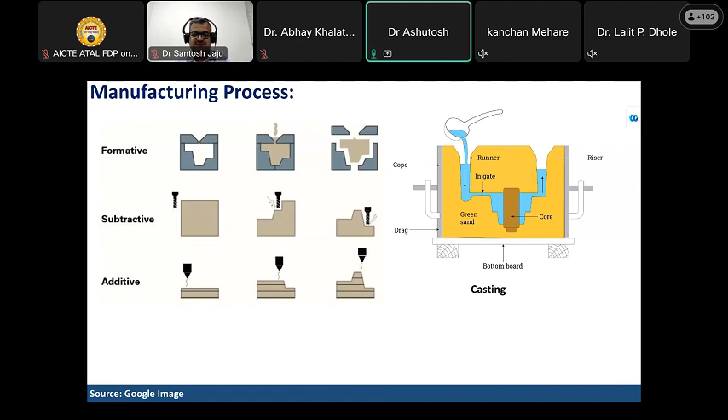These all three are conventional manufacturing processes. The other, non-conventional manufacturing process, which is the main theme of this FDP, is additive manufacturing. In additive manufacturing, everyone knows what we are doing: we are adding material one layer over another, and we get the final product produced. So the comparison between subtractive manufacturing and additive manufacturing is that when we do subtractive manufacturing, we create a lot of waste, the scrap material we are talking about.

In additive manufacturing, with the material we use to get the final 3D object, only a minimum amount of waste is created, in the form of support systems. This is the basic difference between subtractive and additive manufacturing: the waste generated through subtractive manufacturing is very high, while the waste generated through additive manufacturing is very low.

This point, at least, you should remember. So what is additive manufacturing? It is the process of joining material to make a three-dimensional object, usually layer by layer, commonly called 3D printing. It allows manufacturing a component with virtually no geometrical limit or tool limitation.

In subtractive manufacturing, there is always a limitation because engineering works with linearity. So if there are non-linear components which we need to manufacture, there is always a limitation. But in 3D printing, or 3D manufacturing, or additive manufacturing, this limitation is not there.

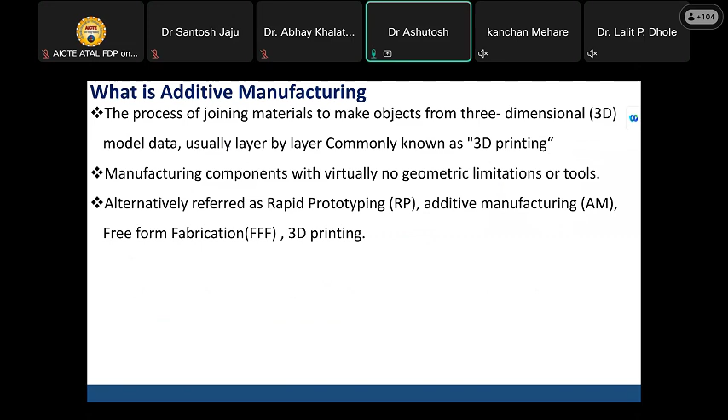Secondly, you have mostly heard the words rapid prototyping, additive manufacturing, free-form fabrication, 3D printing. These are all synonyms. There is no difference between all these manufacturing processes; it is only the name, or synonym, given to them.

The main advantage which 3D printing gives us is moving from designing for manufacturing to manufacturing for design. Mostly, when doing conventional subtractive manufacturing, we design the component based on the manufacturing process, so we always need to think about what manufacturing process we are applying, and do design optimizations accordingly.

While in 3D printing, we are using the manufacturing process as per the design. If your designs are non-linear in nature, 3D printing has the advantage of being able to manufacture it, and it has some distinguished differences from the conventional subtractive manufacturing process, as shown in this figure.

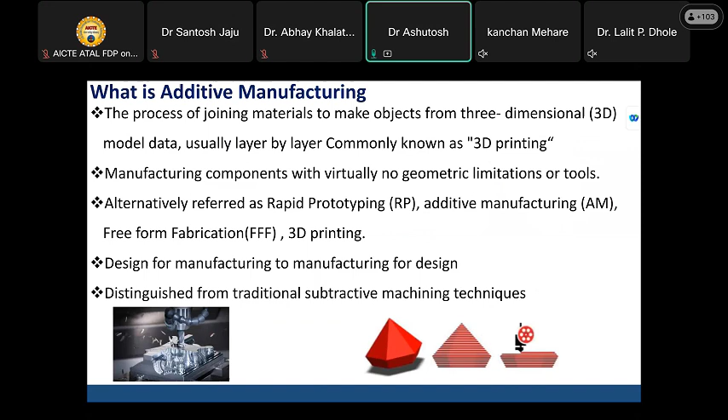The general process used for 3D additive manufacturing first involves geometry development. For this, we need to use any kind of CAD model or CAD software, like CATIA, Creo, Tinkercad, or whatever software you have. There are also many freewares available for geometry development.

Once we develop the geometry in three dimensions, we need to convert that 3D model into the STL format. STL format is basically a surface geometry format which the printer can understand.

After converting to STL format, we do material processing and layering, where we convert the 3D model into a number of slices, and each slice is then printed by the 3D printer by adding one layer over another to get the final object.

Talking about advantages, it gives freedom of design, complexity for free. We are potentially eliminating tooling, so whatever problems exist with conventional manufacturing regarding tool wear and tear are not present with 3D manufacturing.

It is lighter in weight. We have the freedom to decide the infill, starting from 10%, 20%, depending upon the geometry selected. So we can make the material lighter in design, and we can completely eliminate production steps we always need to consider in conventional manufacturing.

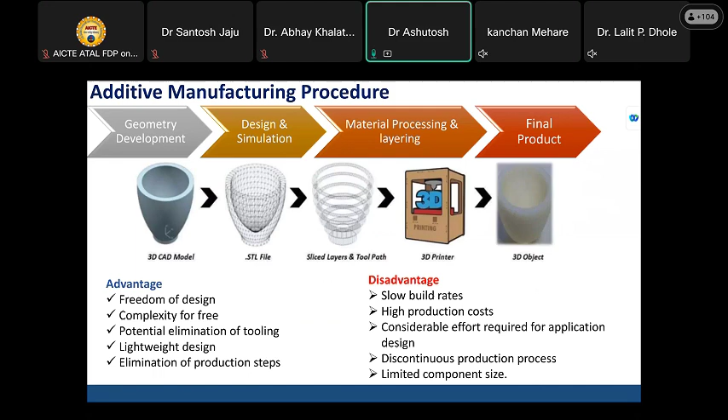So when we need formative manufacturing for high volume production, we use subtractive manufacturing for simple geometry at intermediate volume, and additive manufacturing only in the case of complex geometry at very low volume.

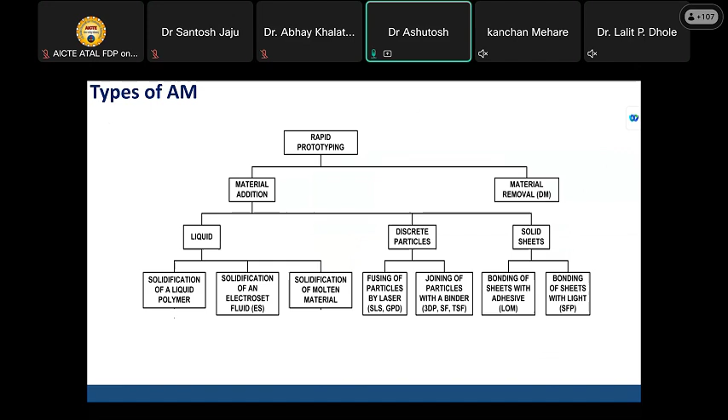Then solid sheet—basically bonding of sheets with adhesive—is called solid sheet additive manufacturing, and bonding of sheets with some kind of light is also called solid sheet additive manufacturing.

When categorizing additive manufacturing processes, they are broadly categorized as binder jet, material extrusion, and others. In material extrusion, it is liquid deposition modeling or fused deposition modeling. The FDM printer, which we already talked about, has been available from the 2000s onward, and it is very cheaply and easily available.

Then we have powder bed fusion additive manufacturing, which includes selective laser melting, selective laser sintering, multi-jet fusion, and electron beam melting. Which additive manufacturing process we need to select basically depends on what material and what is the purpose or functionality of the product we are expecting.

FDM printed parts are always used only for prototyping. It cannot give functionality. There is always a debate about this. In some cases it can definitely give functionality, but only for static structures or just to give an overview. Exact functionality cannot be obtained with FDM printing.

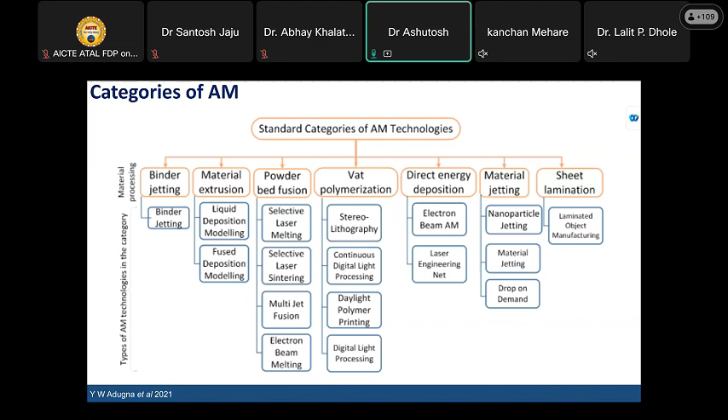Then we have the vat polymerization process. Similarly, we have direct energy deposition, where we are using lasers and so on. Then material jetting process, nanoparticle jetting or drop on demand kind of jetting, and sheet lamination. So these are basically 6-7 categories by which we can classify additive manufacturing processes.

The first process that is most commonly used is stereolithography. It is the most widely used rapid prototyping technique, where we use a photocurable polymer material and use a laser to cure it.

As shown in this figure, it is a photocurable polymer with a movable bed on which one layer gets cured, then the movable table is lowered by one layer thickness, and another layer gets solidified on that. This basic technique is called the stereolithography technique.

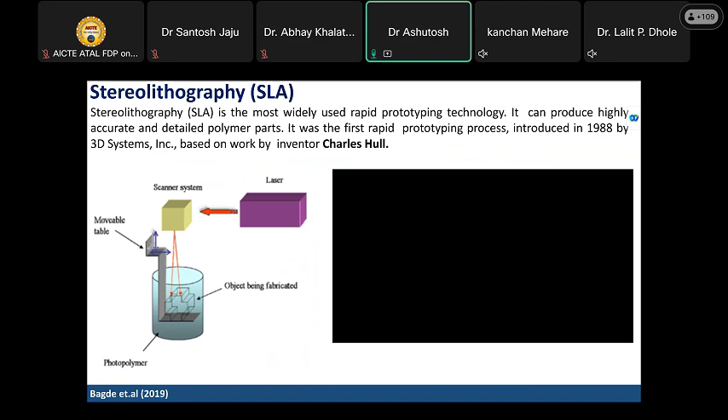We will get sound with this video. If you see how this SLA printing is done, we'll identify it.

This is the build platform, on which the particular part will be manufactured. Below is the resin tank where we are putting the photocurable resin.

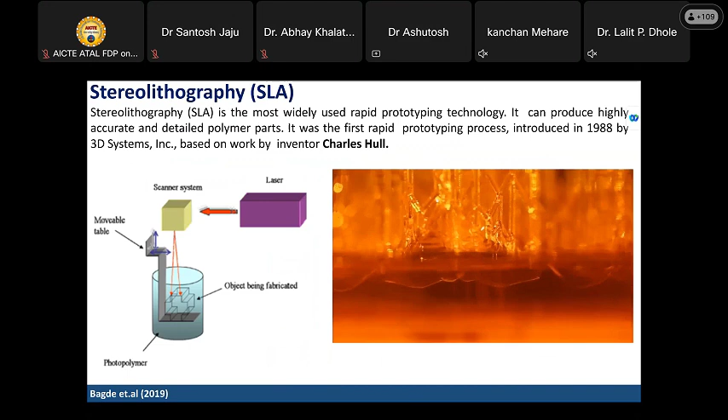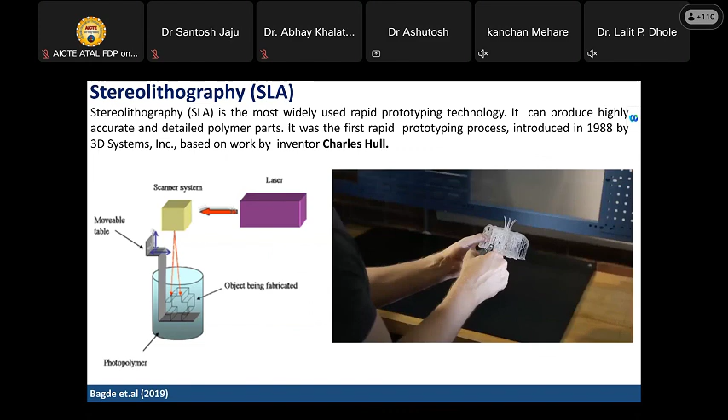Instead, we need to wash the material for the extra material and support system.

With this SLA printing, we can produce the material from the softest part to the hardest part.

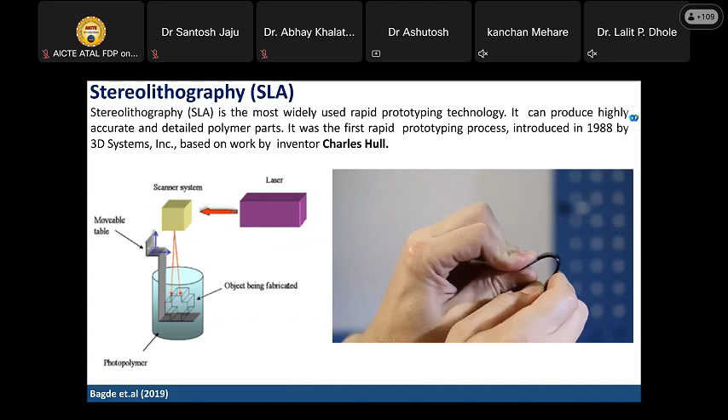This will show the toughness or strength of the SLA printed material in comparison with the FDM printer.

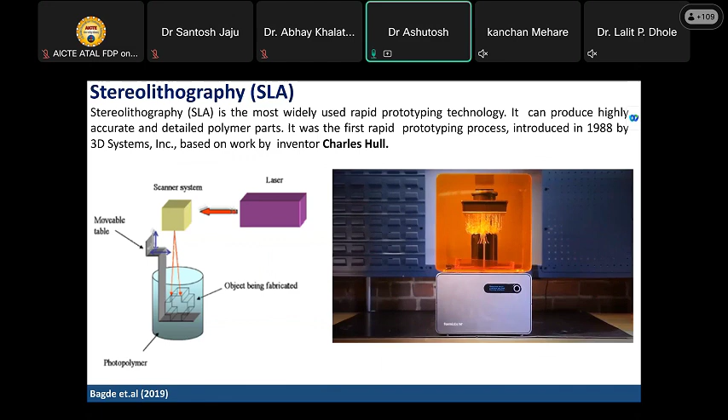So, this is about SLA printing.

Now, another printing process is laminated object manufacturing. This process is similar to a mini 3D printing process where the material is in the form of a spool. The material comes onto the build platform, then it is cut into the desired shape using the laser cutting system.

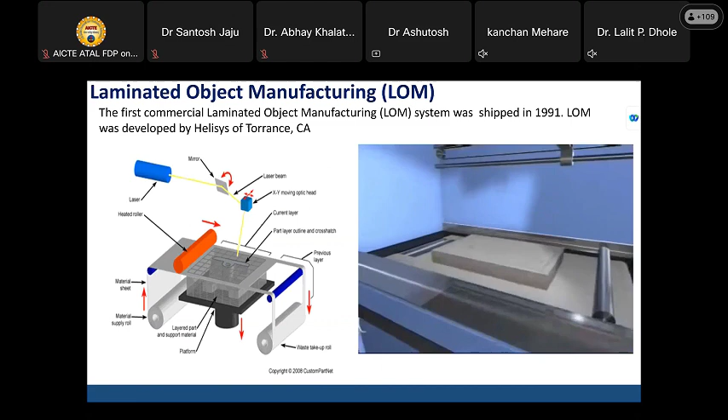If you see, one of the main things that controls it is the pattern.

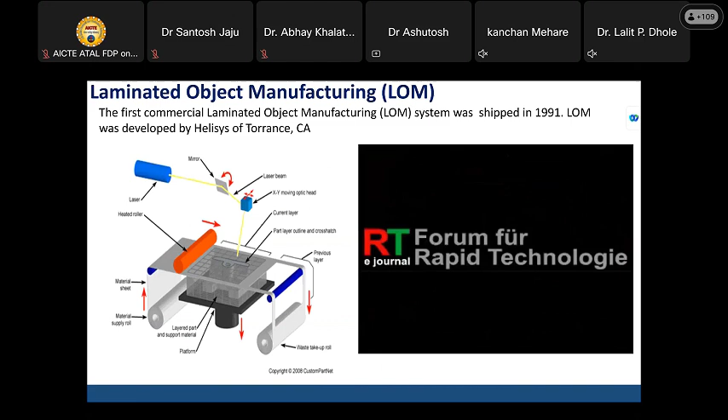This essence is about SLS printing. In SLS, what we are doing basically is using the laser to bind two different kinds of particles together. It consists of the powder bed, roller, and one fabrication platform.

One layer thickness of material rolls over the building platform. It gets sintered using lasers, and once sintered, the building platform lowers by one layer thickness, and a fresh powder layer rolls over that part.

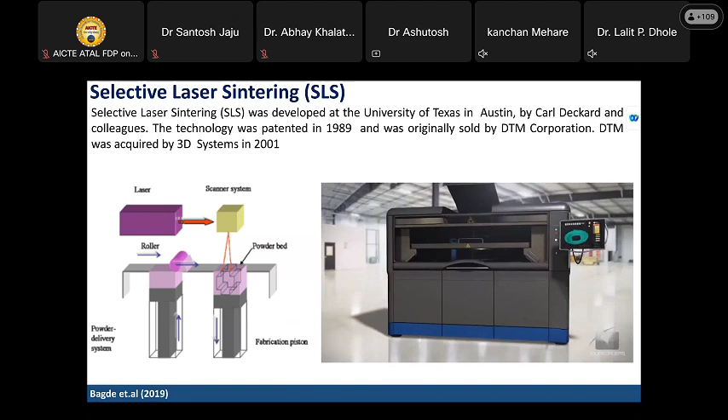This is the SLS printing process, which comprises the use of metal for producing the part for end use without using any kind of tooling. Then the most common technique is FDM, fused deposition modeling.

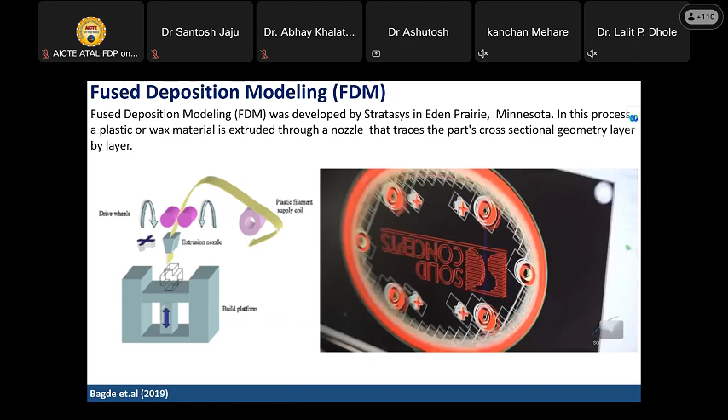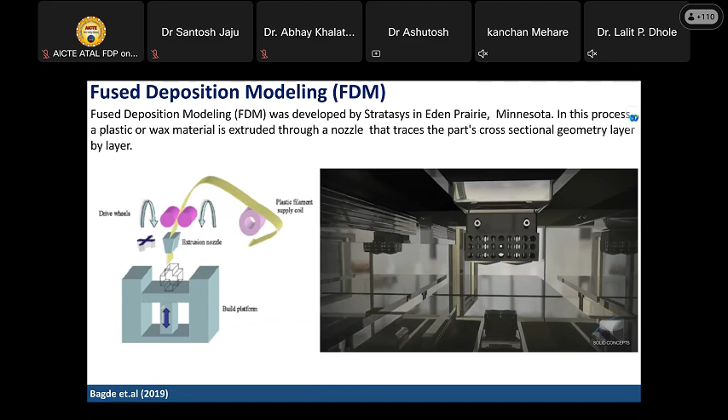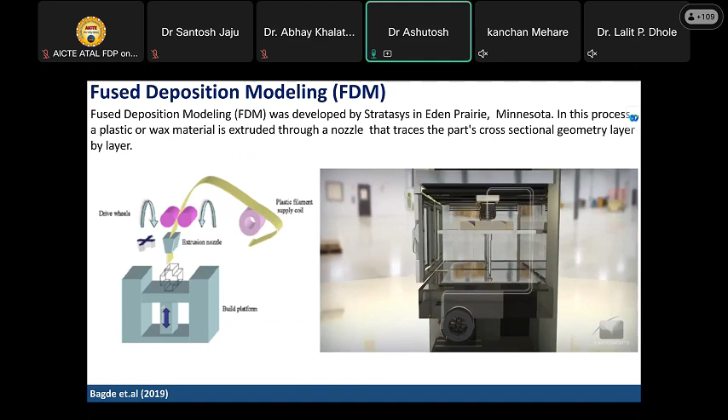It requires a kind of material - one for the model material and also the support material. And to support it, it will be easy.

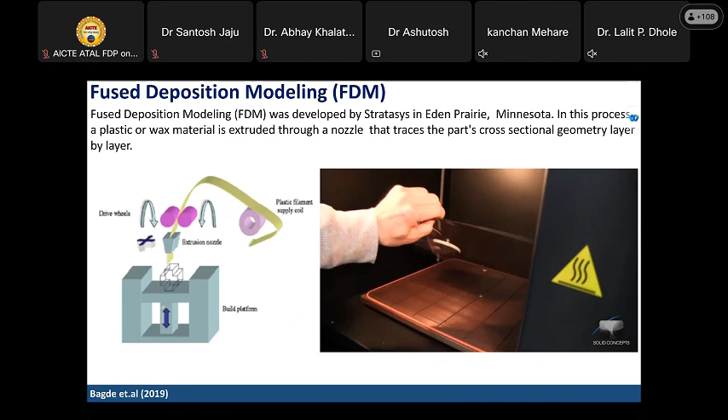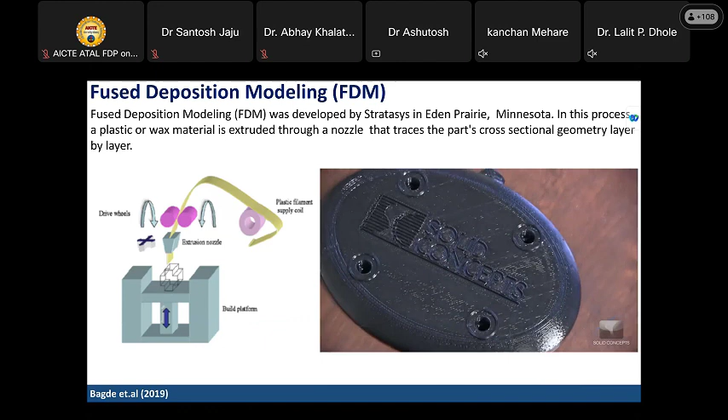So whatever we are thinking, with experience, it requires some kind of post processing to get to the finished surface.

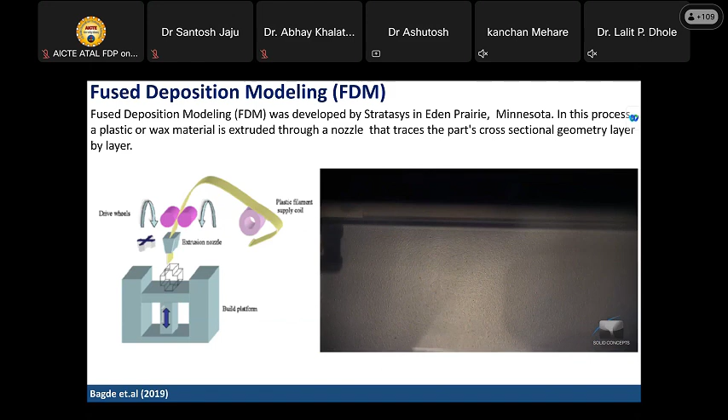So a very common manufacturing process is the FDM process, which we are aware of.

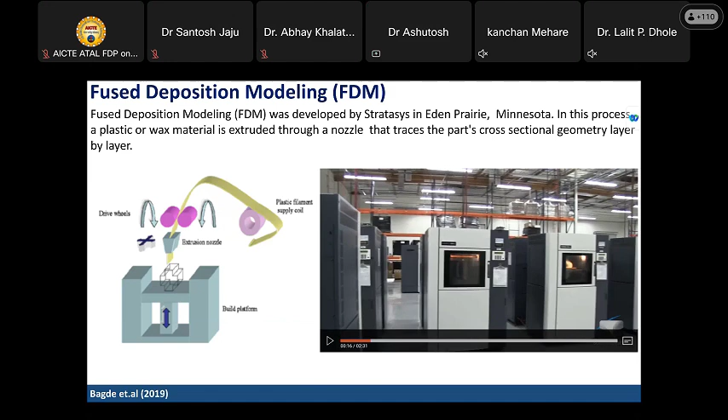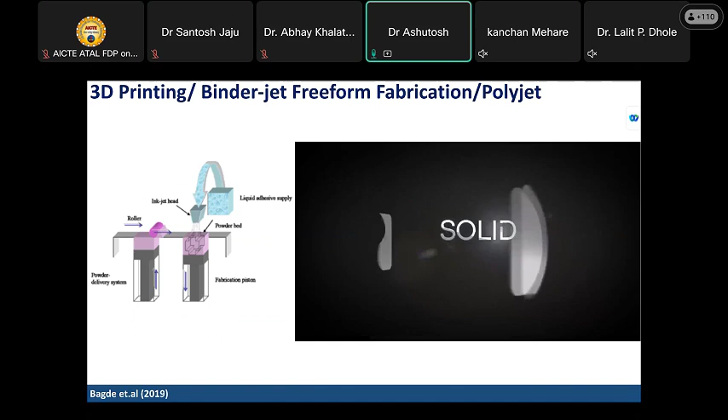The next process is 3D printing and binder jet freeform fabrication, also called polyjet manufacturing. In binder jet printing, rather than melting the material in the form of a spool, we just spread the material with a binder on the building platform. The difference between SLS or metal printing and binder jet printing is that in metal printing we use laser power to sinter, solidify, or mold the material, while in binder jet we use only a binder material which binds the particles together. As shown in this figure, from the nozzle we spread the binder in desired dimensions, and the powder that needs to be solidified comes out from the roller side and attaches to these binders. So it is about spreading the binder and the powder together.

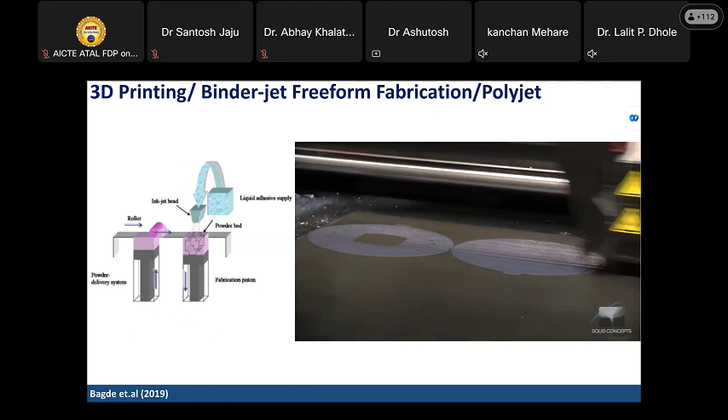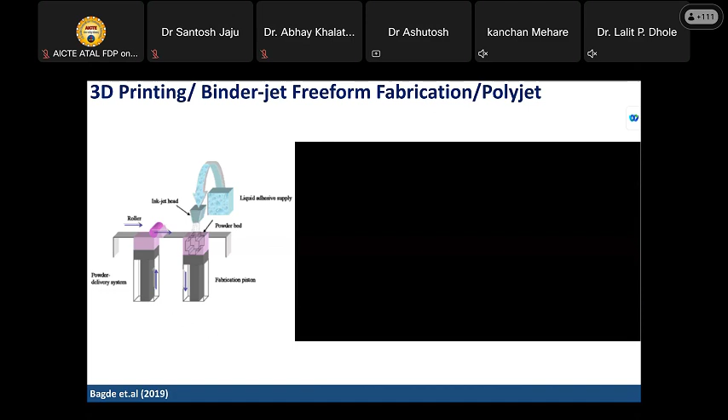So these are the different basic techniques which we are using. Now the next question that comes to mind is that there are so many different kinds of processes. I think my screen gets stuck, it is somehow delayed.

So the next question basically comes right now: there are a number of additive manufacturing processes, so what is the thumb rule for selecting the material or selecting the manufacturing process?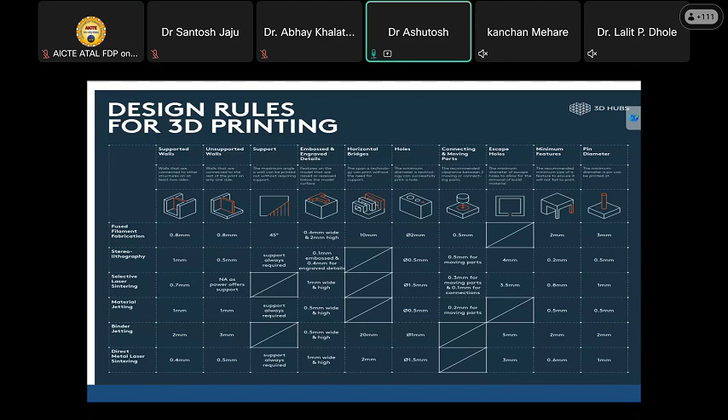This table is readily available on 3D Hubs, and you can get more detail there for understanding. I'm not going to take you through all the technicalities of these rules for the 3D printing process.

So basically, what is the timeline and application of 3D printing? Additive manufacturing or 3D printing started from 1988 onwards, and the first graph will show you how it evolved. Now 3D printing has huge applications in any kind of field - you just name it, you will find some kind of application.

Basically, 3D printing, especially the metal 3D printing process, was innovated only for aerospace applications, because the structure of different components used in aerospace industries is so complex that it is very difficult to produce with normal subtractive manufacturing. So it is basically the need that drove the invention of the metal 3D printing process.

Then you can find additive manufacturing in armament, automobiles, dentistry, electronics, furniture, implants and prosthetics, jewelry. You just name the area and you will find there is always something with the 3D printing process that we can do. Toy manufacturing is also another area where people are using it.

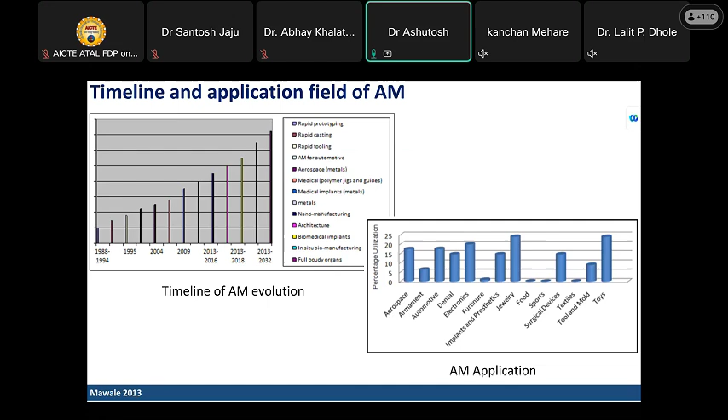Food is a very good area where people right now are not that much aware, but yes, they are using 3D printed food for serving to customers. In ornament and jewelry sections, now everyone wants some kind of uniqueness in their jewelry, so 3D printing companies are manufacturing 3D printed jewelry. I will give some examples of that.

When we are talking about the market size, in 2017 the market size was about 902 million dollars, and by 2027 it is expected to grow significantly over 10 years. This gives a clear picture of the future of 3D printing. It is only one segment, customized jewelry, where such huge demand exists, growing at 21% CAGR.

Another application is 3D printed food. There are some companies which use 3D printing, like Clear Meat. I met the founder and co-founder; they are from JNU, Delhi, and they produce 3D printed meat for use. Sugar and Space is another company which produces this.

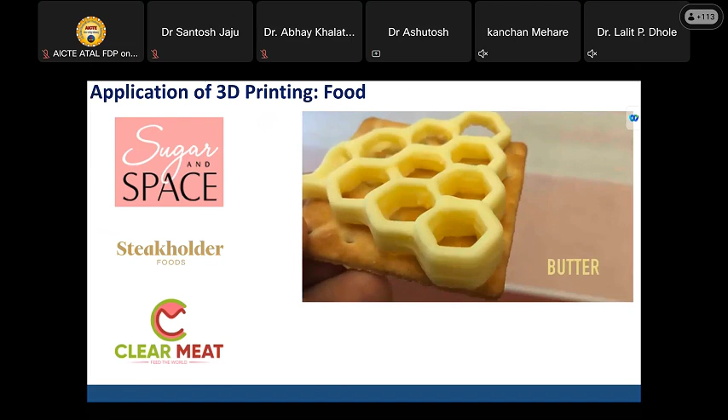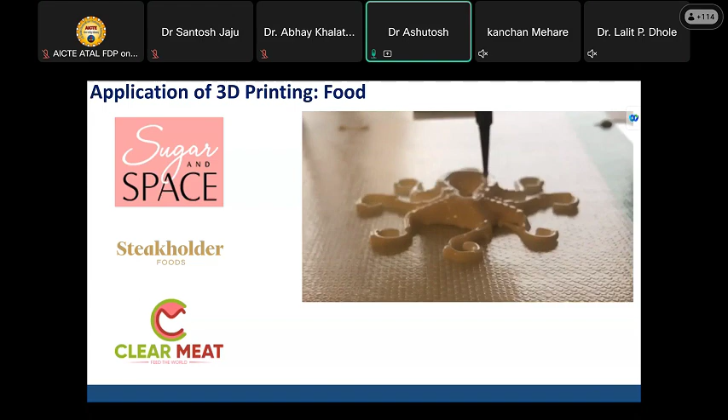All are the edible food which has been made using 3D printing.

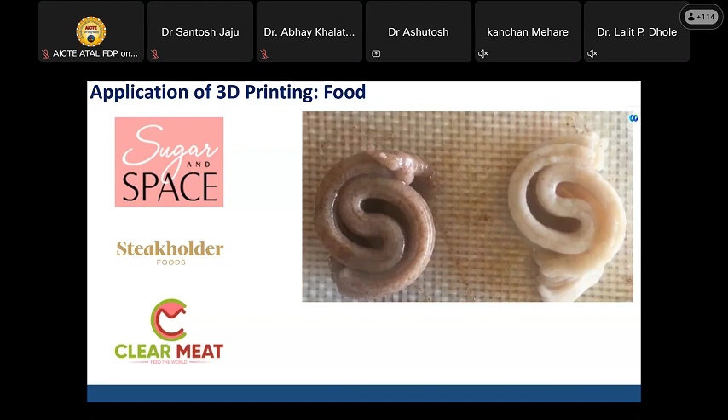So just go through the edible bites and you will find very good kinds of 3D printed food there. So coming to our main topic, the application of 3D printing in healthcare.

When you are talking about healthcare, you just consider the human anatomy as a mechanical body. It consists of different kinds of structures, support, joints, some soft skins, soft tissue, some cannulas and all. 3D printing can play a major role in manufacturing these kinds of things.

The picture itself shows that we are manufacturing cranial plates, we are manufacturing some kinds of cannulas, we are manufacturing prototypes for fingers or acetabular cups and all. So it has a huge range of applications.

When we are exactly talking about different trays, aligners, night guard splints, these are basically dentistry applications where crowns and bridges or temporary dentures or complete dentures are getting manufactured using 3D printing. Even in India now, there are some dentists who are using 3D printing to provide their customers a good level of satisfaction. 3D printing can also be used in any kind of tissue engineering.

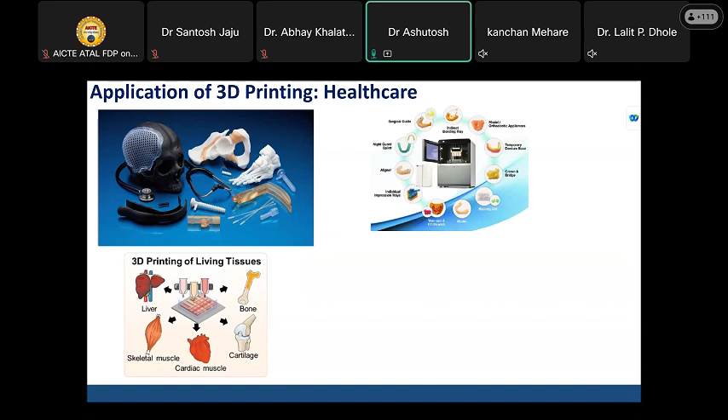In my next lecture, maybe tomorrow or day after tomorrow, we will discuss more about how we can use 3D printing for organ regeneration and tissue engineering. It can be used for manufacturing liver, bone, cartilage, cardiac muscles and all. I personally worked on the area of bone in my PhD work. Cartilage we are working on right now, and a cardiovascular project is also currently being executed. We will talk about this tissue engineering in our next lecture.

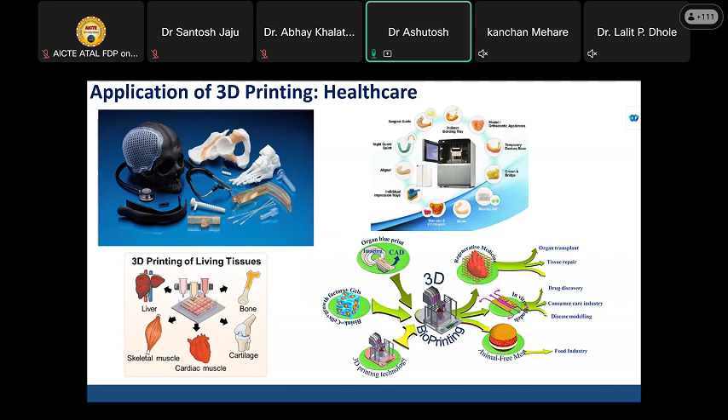These are some areas where 3D printing can be used: organ transplantation, tissue repair, drug discovery, food industry, and many more. So next, my few slides are about the work which we are exactly doing with this 3D printing.

The work which I am showing is not only associated with me alone, it is a completely a team effort. You can consider me only as the face of our organization who is representing it. No doubt, I am one of the key role players in this research.

This is a study which we already did with IISc Bangalore, Professor Basu. What we are doing is trying to produce a 3D printed mold on which we can mold PMMA material to get the cranial flap.

On this mold, we are again doing the molding of PMMA material, which is polymethyl methacrylate material, widely acceptable in clinical scenarios and which already has FDA approval. Then it can be put into the cranial part of the patient.

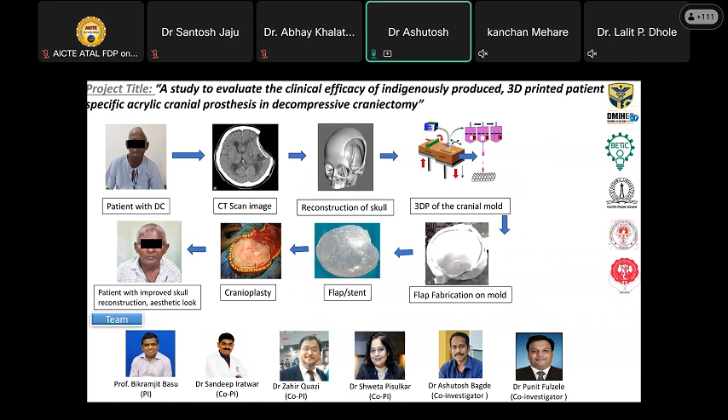I personally did 10 cases along with our neurosurgeons in our organization, and a few of the images which I would like to share are here. This is a patient; you can see the first patient where we are putting this 3D printed or 3D molded PMMA flap on patients.

This is our patient 2. This is patient 3, and this is patient 4.

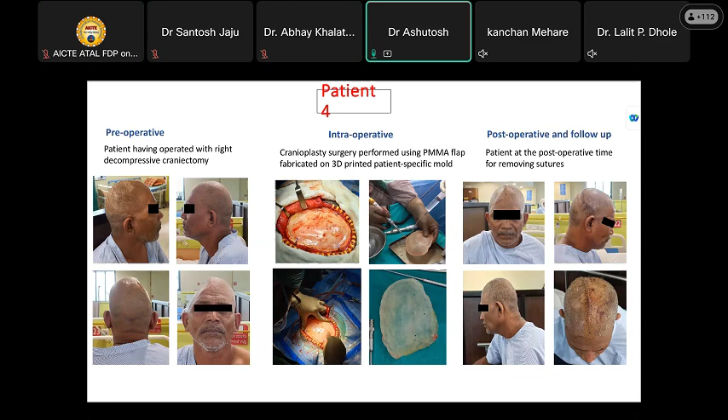So I did a 10 patient study, and we have published a very good article based on this study. When we say what is new in this, people are doing it a lot. But believe me, if you are a good researcher or research scientist with some insight about 3D printing, you will definitely come to know about the practical problems associated with this kind of printing. We also came across problems when we did the 10 patient study.

This 10 patient study was conducted during the corona period. Patients were recruited after March 2020, though we started before in February, and the study continued for 2 years till 2022. Since cranioplasty is not a mandatory surgery, it's an additional surgery that can be done later without causing functionality loss. So the patients we recruited for this clinical study, what we found in the CT scans is that the scans were from before or after corona, but the patient was operated after the COVID period, and there is slightly a change in the bone formation of the flap we manufactured.

As a researcher, it's our duty to find out the reason for that. Because when we use 3D printing, we use CAD, so ideally the clinician should be able to close his eyes and place the flap and complete the surgery. But this is not true in practice, so we faced many challenges with that.

So we tried to address the challenge, and we found that during the corona period the bone got remodeled. What medical science says is very surprising: after 25 or 30 years there is a minute growth of cranial bone.

If you touch your cranial part, you will find it is the hardest bone of our body. Why is it the hardest bone? Because it consists of cortical bone, completely made up of cortical bone, which is solid in nature. It does not have any vascularization or angiogenesis, no blood flow over there, and that's why it's a completely solid structure. Medical science says basically after 25 or 30 years, it is considered that no bone gets regenerated in that part.

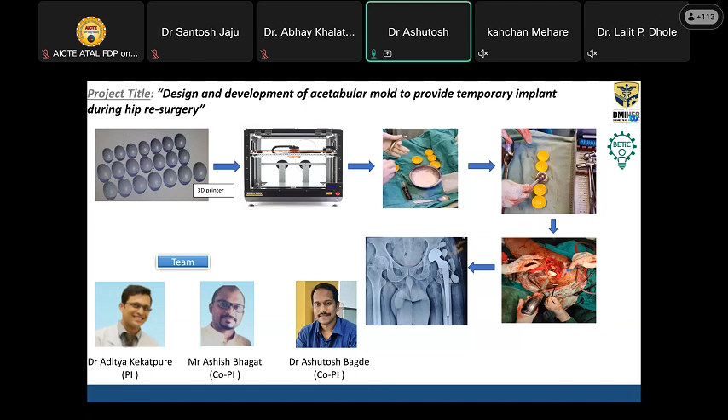In the lower right corner you can see we did one clinical case study with this. After completing the case study, the patient was able to walk after 3-4 days. We haven't published this study because a single clinical case may not be sufficient to present, but we are happy to have created a positive impact in one patient's life, where normally a patient is unable to walk for 15-20 days after surgery - this patient was able to walk after just 3 days. We are thankful to the clinician for suggesting this problem.

This is another project we already did with VNIT, about a surgical guide, and I think Dr. Sandeep has elaborated more on this. This is a collaborative project with Dr. Sandeep, Professor Kuthe, and our institute.

We were able to produce the 3D printed surgical guide and the 3D printed patient graft. We did one clinical study where we cut the mandibular tumor using the surgical guide, and put in a 3D printed metal graft, shown in the upper right corner. We followed the patient for the last 3-4 years, and the patient is doing quite well with the problem associated with the mandible. The lady has some different health issues due to age, but she is completely fine with the 3D printed graft.

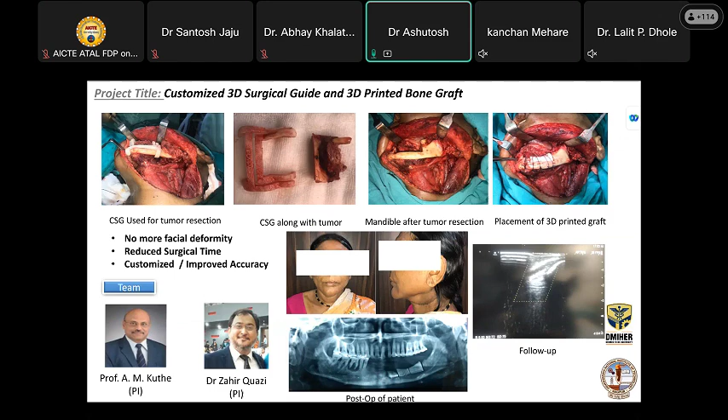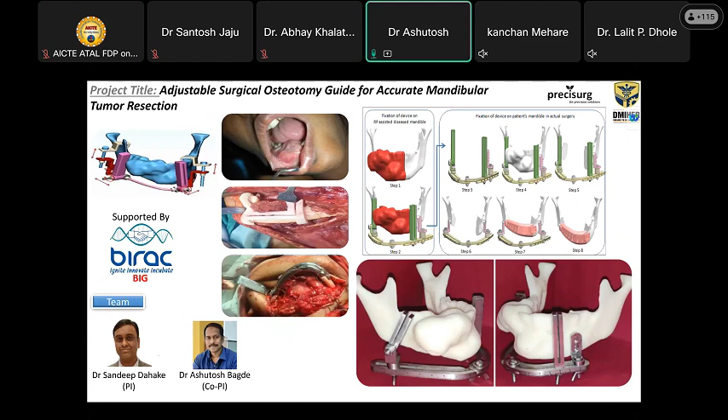This project was done with Dr. Sandeep, who has explained how he used 3D printing for developing a surgical guide for surgical osteotomy, mandibular osteotomy. He produced a graft and a surgical guide which can be used for mandibular tumor resection. I'm not going to elaborate further since Dr. Sandeep has already explained it, and he is the best person to explain it. This is a collaborative project with our institute, our center, and Dr. Sandeep, who was also incubated at our BETIC Center.

This is another project funded by SERB, a CRG project, about development of functional bio-ink for osteochondral tissue regeneration. We will touch on this project in the next presentation too. It consists of bio-ink with cells, which can be printed using the 3D printing process, and it is expected that whatever we produce could be used for osteochondral regeneration.

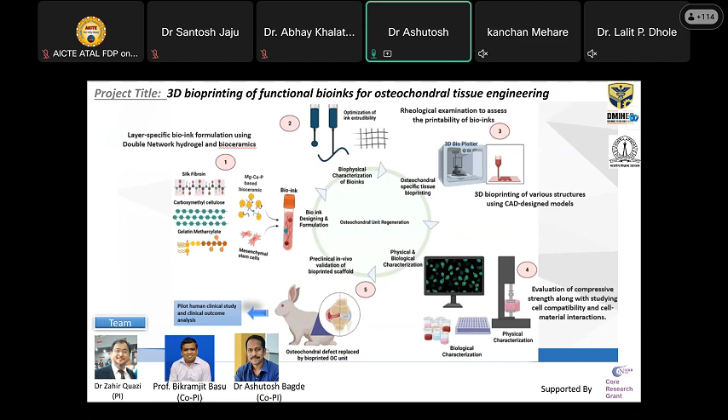Osteochondral is a part in our knee. With arthritis, the knee gets worn out, causing pain. So in that condition, we are trying to develop a scaffold, a 3D printed part capable of generating bone from one side and cartilage from another side. This combination of bone and cartilage is called osteochondral tissue. We got a fund for that with SERB, and we are working on it.

This is one project which is about to finish. It is about 3D printed skeletal tissue for customized phalange reconstruction. In your finger, you will find the smallest bone joint, called the phalanges. We are producing 3D printed phalanges for bone regeneration. We have completed all in vitro studies, and we are now completing the animal trial. Once we get the animal trial results, we will go for human trials. By using the 3D printing process, we are able to produce such complex geometry.

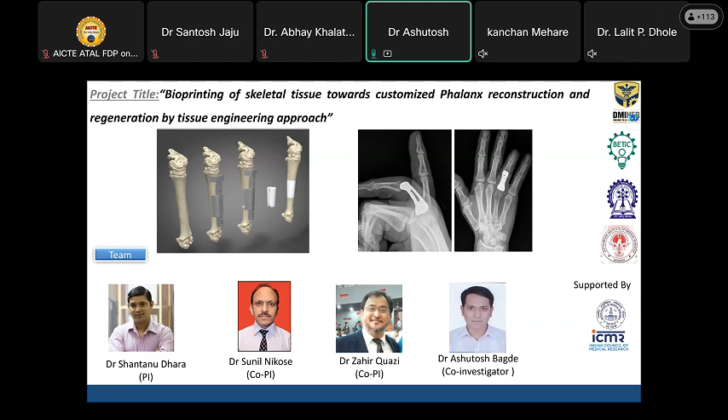The conventional process for this involves taking the impression, preparing the wax pattern, matching the shade, and converting it again by making a negative mold - a multiple, exhaustive, and time-consuming procedure. Now with digital workflow, this study was actually completed during COVID itself. We completed 3-4 cases and published a good article based on this study.

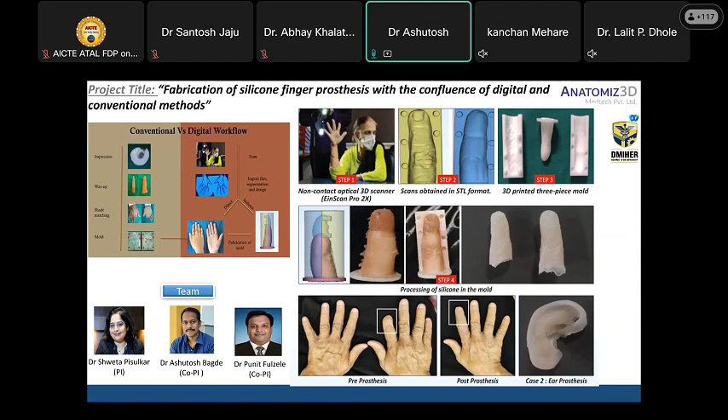This is one more project on the restoration and recreation of a virtual prototype of a maxillofacial defect, for the same patient shown in the previous slide about the orbital prosthesis. We used a scanner costing about 12 lakh, the same scanner GHRCE also has. For this study, I hired the scanner from a Mumbai company, paying 15,000 per day, so for 2 days I paid 30,000.

The question came to mind: since smartphones can take pictures from any direction or angle, can we use photogrammetric technique to produce a 3D printed part? So we developed a standard operating procedure where we use a smartphone to produce the 3D design, and once we have that design, using FDM, SLA, or any 3D printing process, we can print the mold on which we design the prosthesis.

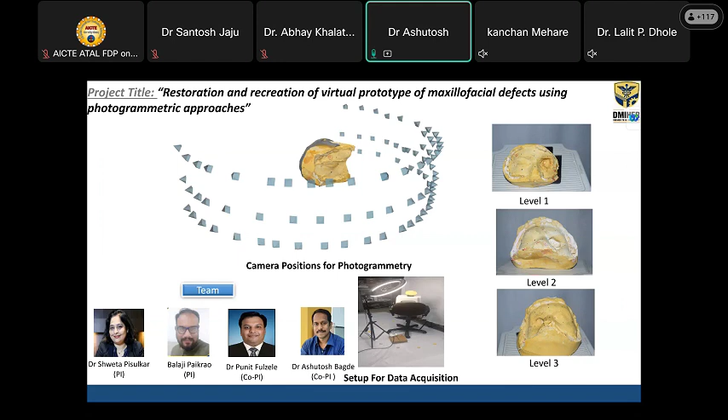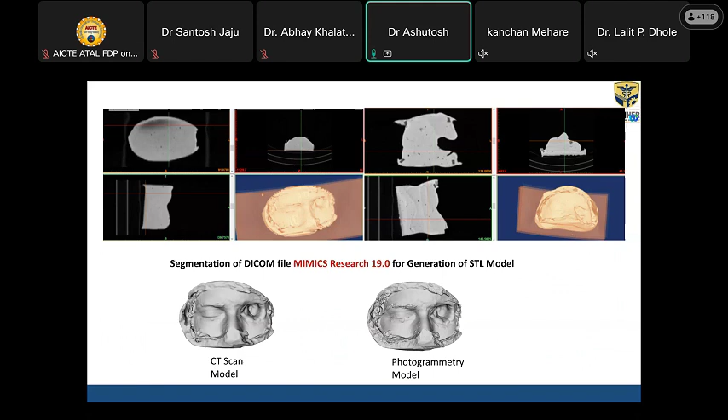The challenge we faced was that a 3D scanner was not available to us at that time, so we tried to find a solution using the phone. We developed the standard operating procedure and compared it with the CT scanned model versus the photogrammetric model as shown in this figure. The difference is so minimal that the naked eye can hardly identify it.

We used a DSLR camera for this. We started with 400-500 images, but since we cannot ask the patient to sit for 400-500 photos, we used a stone model of the same patient kept on a table, and took photos from different dimensions. We started with 400 plus photos and eventually landed with 30, 60, and 90 photos.

We compared the DSLR with the CT scan. We compared the Google Pixel with the CT scan. We compared the Samsung phone with the CT scan. We compared the iPhone with the CT scan. Then we tried to determine what would be the optimum number of photos.

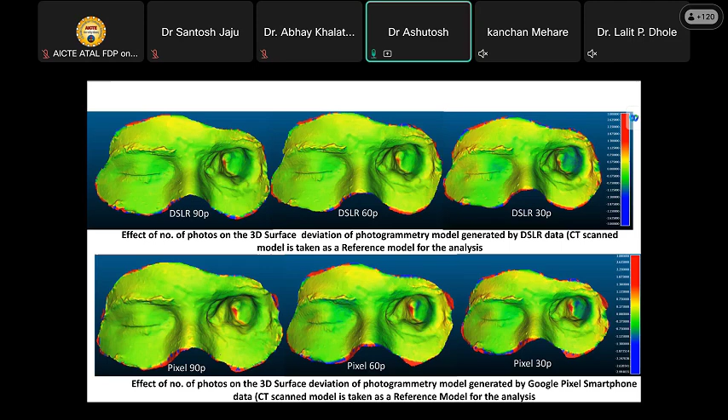We tried to quantify what the CAD modeling process should be. We did the CAD modeling, created the STL format, printed it with our FDM printer, and designed the prosthesis. We evaluated the prosthesis produced with this photogrammetric technique against the conventional technique and found hardly any difference. Whatever differences exist are only from the engineering perspective, but they are fairly acceptable from the clinical aspect, as judged by the clinician.

This is one more project I'm keeping brief. This is a project by a startup associated with our Bionics Center; they produced a device for sleep apnea using a DLP SLA printer. They scanned it and designed the tray or appliance for sleep apnea patients, which provides an artificial airway for sleep apnea.

I think we are running short on time, so I'll move fast forward. This is one more model, basically my company, ATMEN Technovention. I am a co-founder and Abhijeet is a co-founder. We are fortunate and proud that we are both alumni of GHRCE. In 2018 or '19 we started the company with BIRAC BIG funding.

We tried to address developing a device which can identify blockages in the ET tube. We designed the complete device, did the programming, the electronic part designing, the lab testing, and so on. The outer casing and everything that gives the product a good feel is produced using the 3D printing process. To date, we completed the pilot clinical trial and validation with the 3D printed part using the FDM printer.

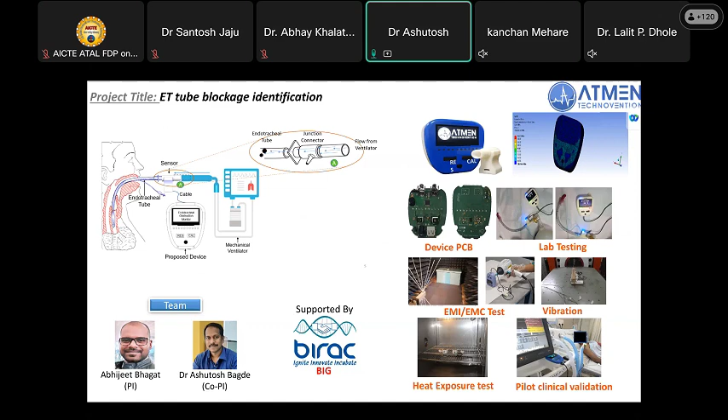I'm not going into the technicality since this FDP is basically on additive manufacturing, so maybe in another session when we meet next time, I will talk more about it, because this is our baby and we know everything about this part. We completed the clinical trial with the 3D printed product.

This is one more company incubated with our Pioneer Center where they are using the DLP or SLA printer to produce a point-of-care device for identifying or screening cervical cancers. The device, shown in the lower right corner, is an assistive device that can be attached to a phone with the rear camera. They developed an AI-based model which takes a photo from the cervix and identifies whether there are chances of cervical cancer.

Dr. Anupama Bhute, who is the innovator and founder of the company SINDICOLPO, is our faculty with more than 25 years of clinical experience, and she designed this entire device and produced the proof of concepts. She completed her clinical validation with the 3D printed part.

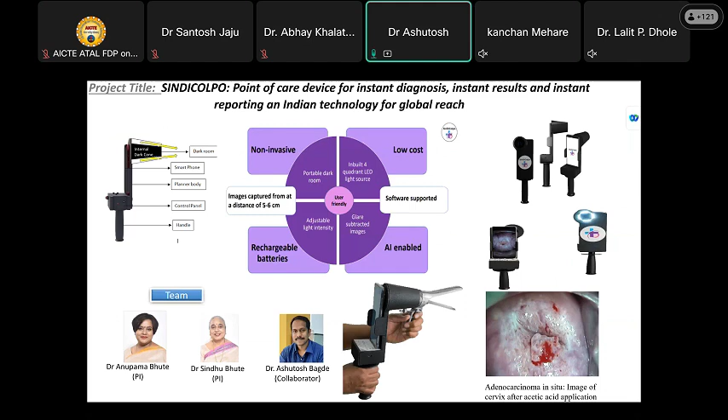So how 3D printing can be used for this medical product development, and how we can get it validated, is basically what I would like to emphasize. I am not talking more on the technical part because I just want to stick with the 3D printing applications which we already did or are doing with our universities.

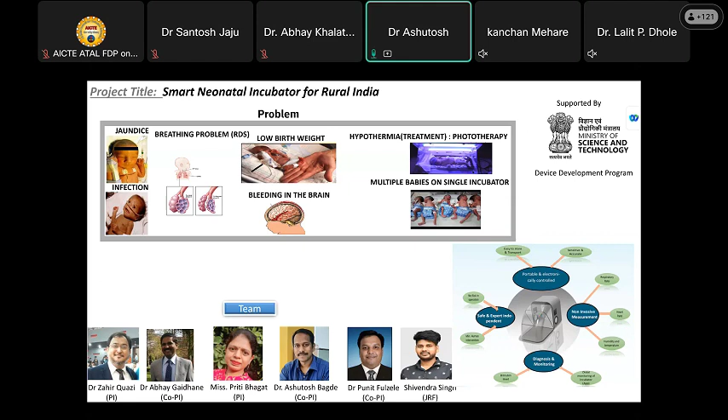This is one project funded by DST, about incubator development. We are trying to develop an incubator which will identify, on a non-contact basis, vital parameters like heart rate variability, respiratory rate, respiratory variability, temperature, humidity, and more. The complete product, which we initially designed with an acrylic model, was fabricated using additive manufacturing. So this is about how we can use additive manufacturing in a biomedical scenario.

There are a few examples which I tried to explain to you, about how we are using 3D printing for our product development, for our research, and all.

And the last part of this is a message for you: the scientist is not a person who gives the right answer. He is the one who asks the right question. So I am waiting for the right question from the great scientists among you. Thank you very much.